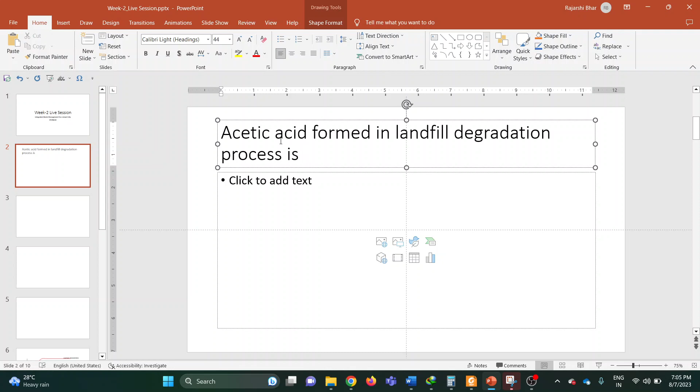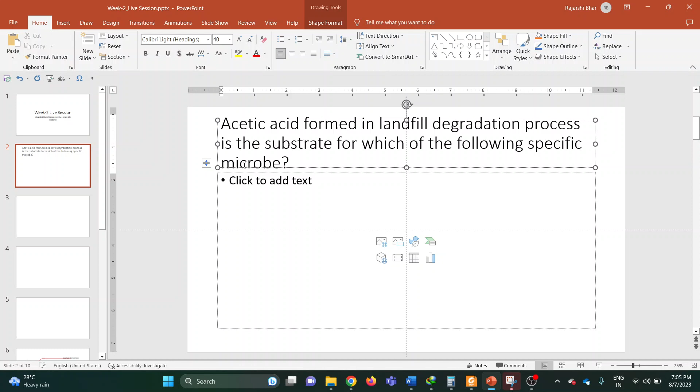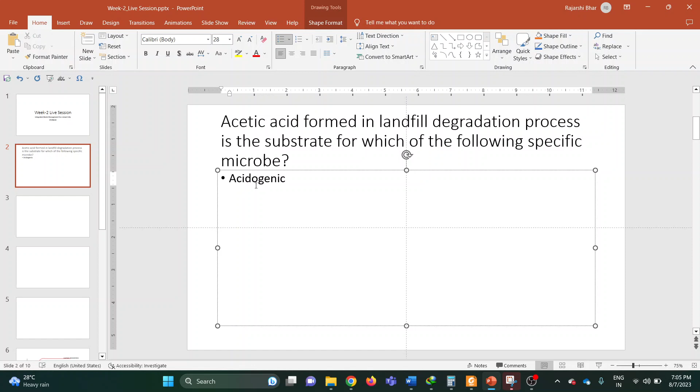so the question is that in landfill degradation process, acetic acid is formed, and which of the following microbes is responsible for the production of acetic acid? So your options are acidogenic bacteria, aerobic bacteria, methanogenic bacteria, or anaerobic bacteria. So again, I will repeat the question that acetic acid is formed during landfill degradation processes.

When the microbes present there, they act on a substrate. So which microbe is responsible for the production of acetic acid? One of the options that I can see, option D, Mohammed Hashim has chosen option D. Okay. I will wait for a couple of more minutes for others.

So I will be basically asking two types of questions based on this particular statement. One is what is already written here, and another one I will also ask. So in here it is written that acetic acid formed in landfill degradation process is the substrate for which of the following specific microbes. So that means which of the following microbes eat acetic acid as their food. This is one question. And another question that I would like to ask is which of the microbes are responsible for the formation of acetic acid? And for that question, it can be one of the options and it can also be something else.

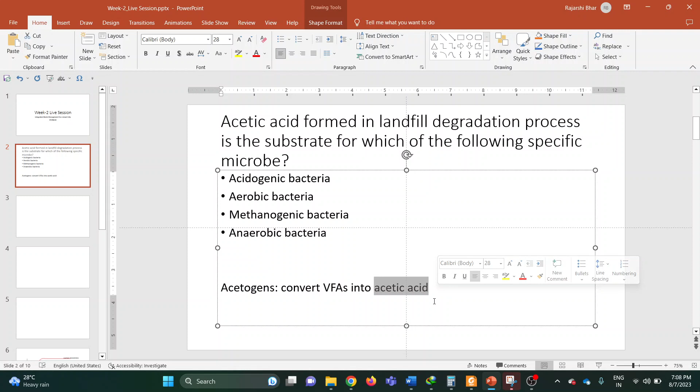Okay, so I can see some of the options. Yes, methanogenic is one of the correct answers. Reason being, when acetic acid is formed in landfill, that formation of acetic acid is basically due to a certain group of bacteria which are called acetogens. These are the group of bacteria which convert VFAs, volatile fatty acids, into acetic acid. And the acetic acid that was formed is then further taken as a substrate for methanogenic bacteria. These methanogenic bacteria eat acetic acid and go forward to produce methane.

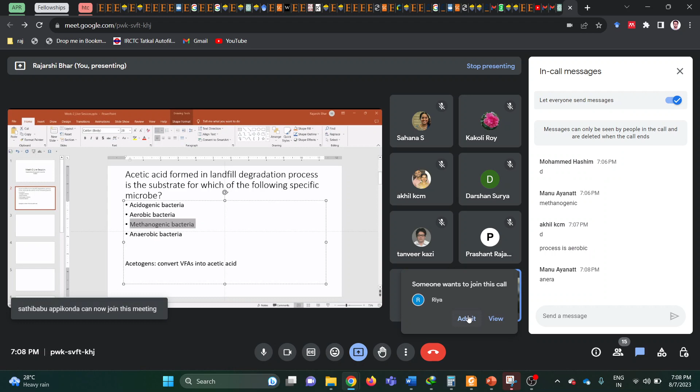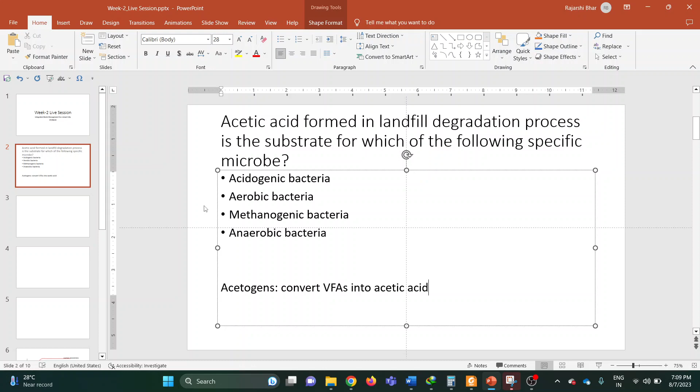I hope this question is clear. Now moving on to the next question. If you have any doubt, please feel free to interrupt me. In the upcoming questions, I will also be explaining in detail about these degradation processes that are taking place in the landfill, and discuss some of its phases. So our next question is

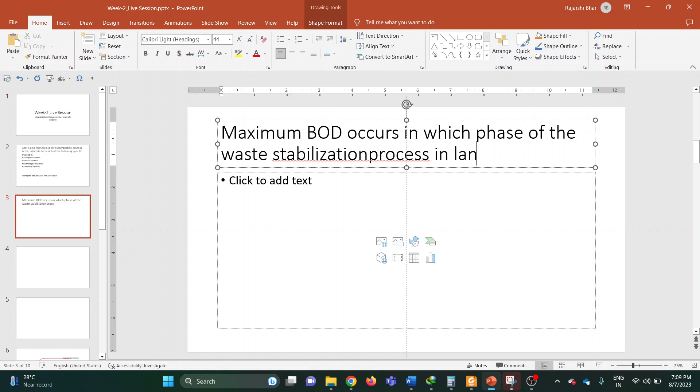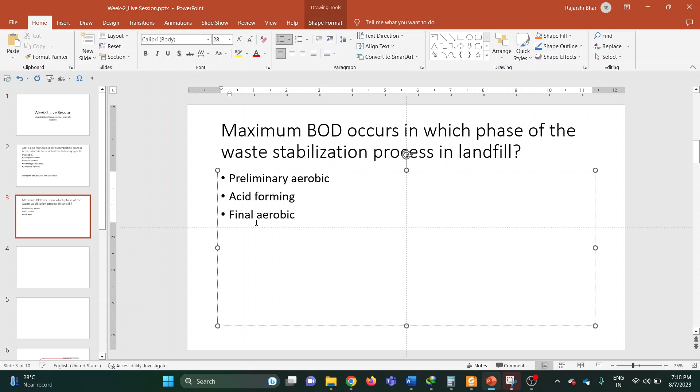maximum BOD occurs in which phase of the waste stabilization process in landfill? So during which phase of waste stabilization in landfill is the BOD maximum? Your options are preliminary aerobic phase, acid forming phase, final aerobic, or methane forming phase. Along with this, I would like to post another question: what is the full form of BOD, and what does it signify and what is the meaning of it?

I will repeat the question again. During the degradation of waste that is dumped in landfill, it goes through various stages. The four primary stages are preliminary aerobic, acid forming, methane forming, followed by final aerobic. Among these four stages, during which stage is the BOD maximum?

First question is that. Second question is what is the full form of BOD? And third question is, why do we use BOD? What is its significance? And if anyone is comfortable, they can also unmute themselves and share their opinion on this.

Yeah, I can see some of the answers. Option B, most of them are saying acid forming phase. Okay, yeah. And biochemical oxygen demand is the full form of BOD. Yes, it is absolutely correct.

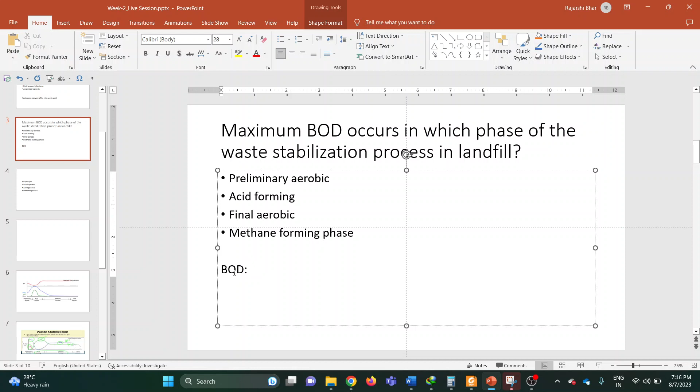Okay, so Manu Ayanatt, I can see that the answer provided is that biochemical oxygen demand is the amount of oxygen required to decompose organic matter by microorganisms. Okay, yeah, this is basically what we are trying to determine. Anything else that you might want to share? You're always free to unmute yourselves and discuss any points that you might want to add on to this or anything else.

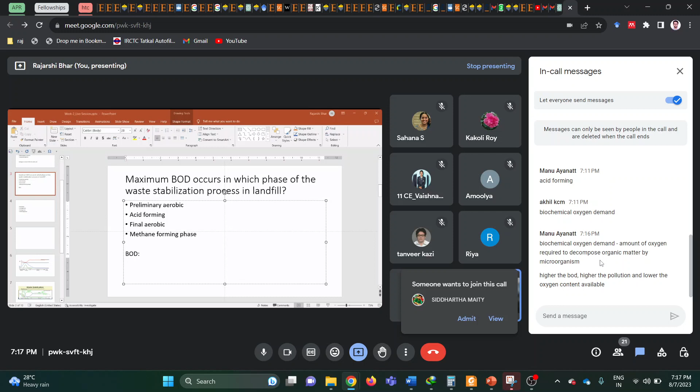Higher BOD means higher the pollution and lower the oxygen content available. Okay, yeah. Okay, fine. So I will share my opinion on this. So as correctly said, biochemical oxygen demand is the amount of oxygen required to decompose organic matter by microbes. And since wastewater or any other water stream may have a huge mix of different kinds of compounds, particularly organic compounds,

it is very difficult to get the concentration of those organic materials present in our water body or anywhere else. So what we do is, we know that one characteristic property these organic materials exhibit is that when I throw them into the environmental matrix, the microbes act on them in an aerobic condition. The microbes consume oxygen and degrade them mostly to CO2, and carbon monoxide when this conversion is not complete. So mostly it is CO2.

So I will take the analogy of dumping sewage into wastewater. If I am dumping my sewage into wastewater, first things first, our sewage has a huge organic loading. The COD of the sewage is easily more than 300 milligrams per liter, and it can often go as high as 800 milligrams per liter. BOD is a bit less than COD; for readily biodegradable material, the BOD is equal to 0.67 times the COD.

So when I dump such waste into the water body, it starts consuming oxygen. That is how we correlate the amount of organic material present in that water body, because there is no way to directly estimate their amount. So we correlate it: the higher the oxygen being consumed, the more organic material must be present. That was the motivation when people started estimating biochemical oxygen demand.

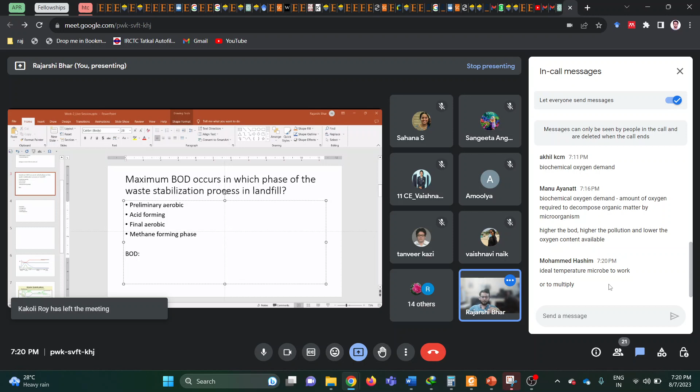What you have said is correct, but by that example I can increase the temperature to 27, the microbes will eat the food faster, and we can get 80% removal of organic matter in, let's say, 3 days. The reason it is 5 days and 20 degrees centigrade is that, if you want to put any logic behind it, there is none except one: biochemical oxygen demand was standardized in England.

The place where they were determining biochemical oxygen demand was somewhere on the river Thames, and when sewage was dumped into the Thames at that particular point, it took about 5 days for that sample of water to reach the ocean. So the researchers decided that within 5 days, before it reaches the ocean, the organic material should get degraded. That is why they took the 5 day time period.

And the reason behind 20 degrees centigrade is also geographical, because in England the temperature at that time was somewhere around 20. So these two were the main reasons. So if you go on a field visit or to some other place and want to determine the standard biochemical oxygen demand, practically speaking, you won't have the time.

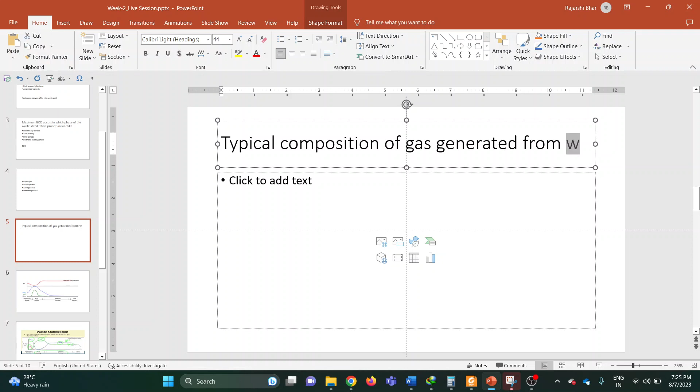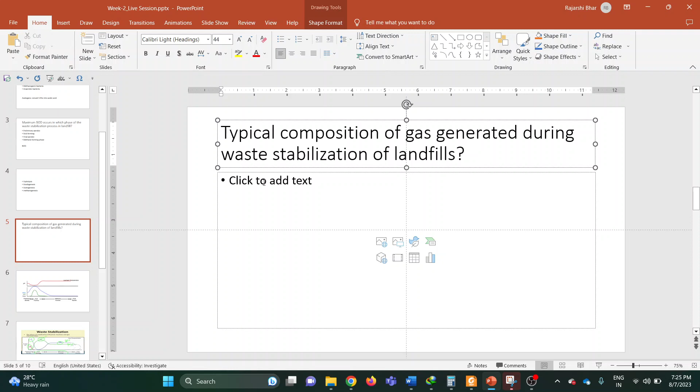It is very easy. What is the typical composition of gas generated during waste stabilization of landfills? Your options are 60% methane, 40% CO2; 50% methane, 50% CO2; 40% methane, 60% CO2; and finally 90% methane and 10% CO2. So which one do you think is correct?

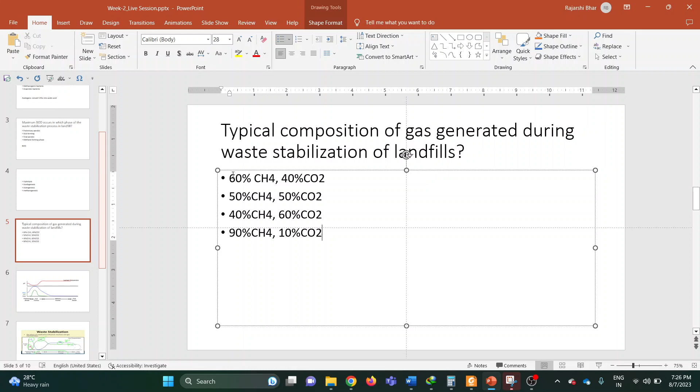Option 1, sir. Yes, absolutely correct. Option 1 is the right answer. Obviously, we know that waste stabilization in landfills is an anaerobic process, so we can already guess that methane will be formed. And I will show you one graph where you will understand why methane is more than CO2. You can see in the screen, I will zoom this a bit.

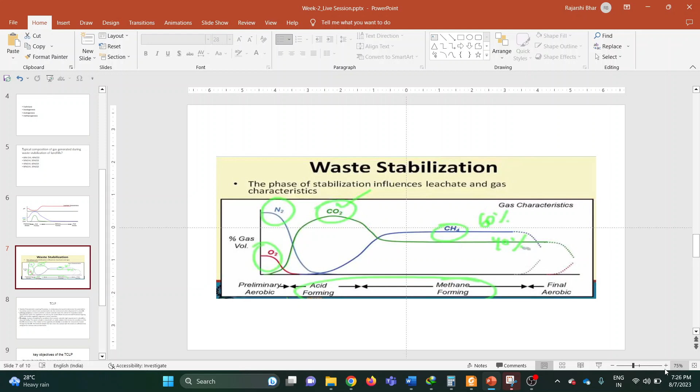When the landfill has stabilized, you can see that the CO2 initially is higher. It is in the acid forming stage where the CO2 is more. But once methane forming starts, the methane production will increase drastically. And during this stabilized stage, you can see that methane is more than carbon dioxide, this green line.

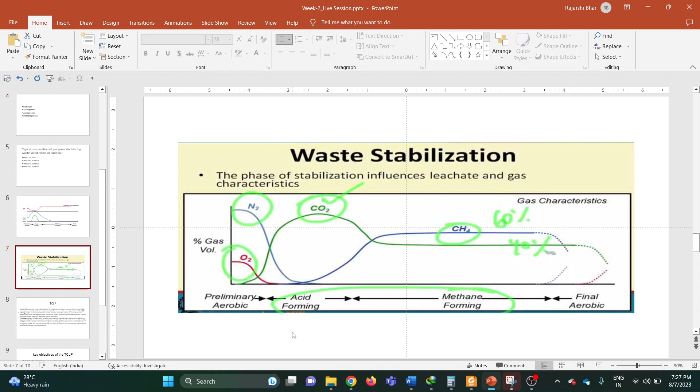Typically, about 60% is methane and 40% is carbon dioxide. But if you really dig deep into it, you might also see trace amounts of hydrogen sulfide. So that was the correct answer. Moving on to our next question, this is an assertion and reason based question. I will give you two statements and based on those two statements, you have to choose a correct answer.

So statement A is: in TCLP test, the solid waste particle size is reduced to less than 1 centimeter. This is the first statement. And then the reason behind this is the finer particles have more surface area, and that helps in... yes. So the first statement is that in TCLP the solid waste particle size would be less than 1 centimeter, and the reason that this option states is that the finer the particles, more is the surface area, and that helps in improving the reaction rate significantly.

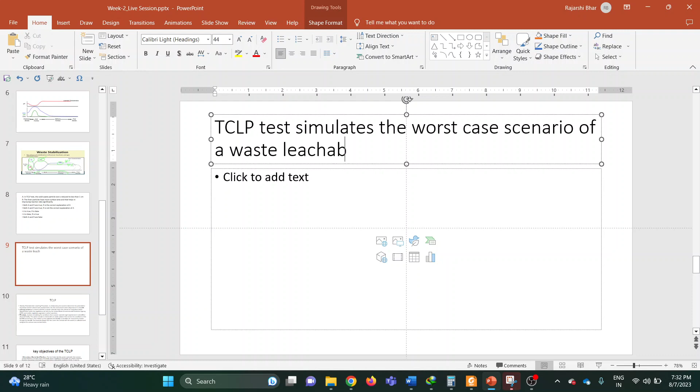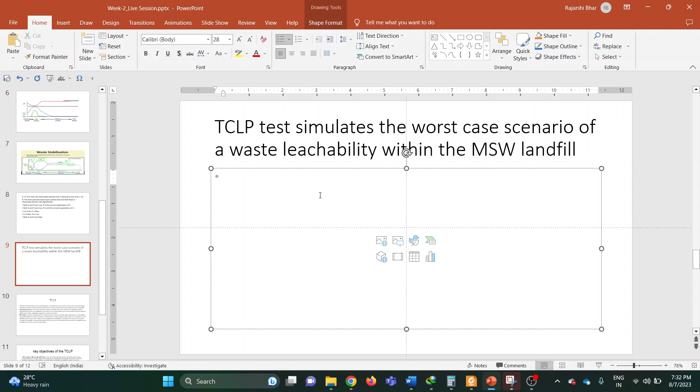So next question is related to a true and false. It is that TCLP test simulates the worst case scenario of a waste. So this is a true and false question. The statement is TCLP test simulates the worst case scenario of a waste leachability within the municipal solid waste landfill. So if your answer is true, please share with us why you think it is true, and if it is false, then why so. It's true because the intent of this test is to understand if the waste can go into an MSW or is it a hazardous waste. Yeah, correct. That is the basic intent behind it.

So have you already been taught how TCLP is being done in labs and in the classes that have been going on? Was it taught there already, or is it about to be taught? Whatever the reason, I will just explain briefly what basically TCLP is. So as you correctly stated, the intent is to determine whether a certain waste exceeds a toxic limit and is hazardous or not, so that it is not disposed in a landfill. So before I dispose any kind of waste into the landfill, I have to pass it through TCLP test. If the leaching is below the standard limits, then it is fine, we can dispose it there. Otherwise, that material will be within the hazardous waste category.

And as per the US EPA, the United States Environmental Protection Agency, it is not recommended that such waste should be dumped into the landfill. Now what happens is that we first reduce the size to less than 1 centimeter. Then in landfill, as I have already shown you, in the acid forming stage, acetic acid, volatile acids, fatty acids are formed. So then the waste material of less than 1 centimeter size is mixed rapidly in an acidic medium to simulate the conditions in a landfill. And if after all that mixing and agitation I find that the contaminant level in the aqueous phase has exceeded a certain permissible limit, then it is not recommended that the waste should be thrown into a landfill.

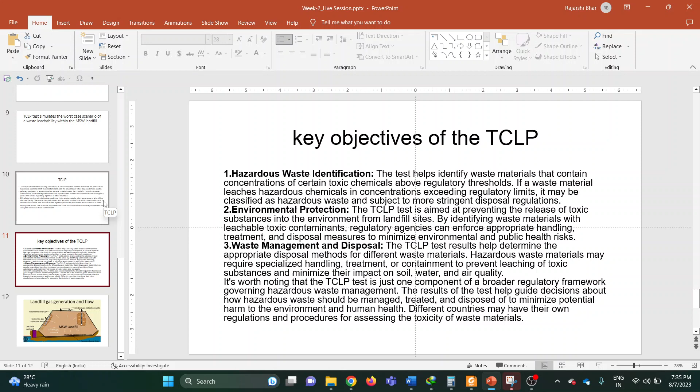So obviously some of its basic objectives are, it can help us identify which kind of waste is hazardous. Based on that, various environmental protection steps can be taken, and the management and disposal of those particular wastes should be done separately, and that will also help us in building a different management plan as well. So these are some of the objectives or goals of TCLP. Then moving on to the next question.

So there is a waste to energy concept. You already know that. The question is why is waste to energy conversion unsuitable for waste which has very high moisture content? I will also write it here. Waste to energy not suitable for high moisture content wastes. So you have to guess why it is not suitable. Okay. So which one do you think out of these four options is correct? Waste which has very high moisture content is not suitable for the waste to energy concept or that kind of disposal method.

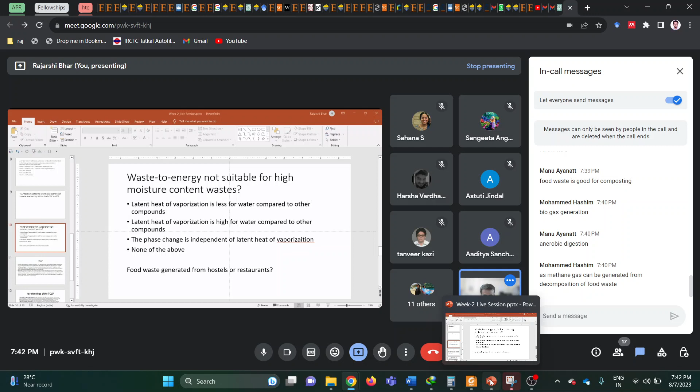So what happens is that in those cases, we often first pretreat our raw material, that is the food waste, through some techniques, and then we can feed it to the microbes. Or another way can be, you add food waste to an anaerobic digester, let it stay there for a suitable amount of time so that the microbes get acclimatized to that kind of feedstock, and then the methane generation will run nicely. So that was it. So moving on to the next question.

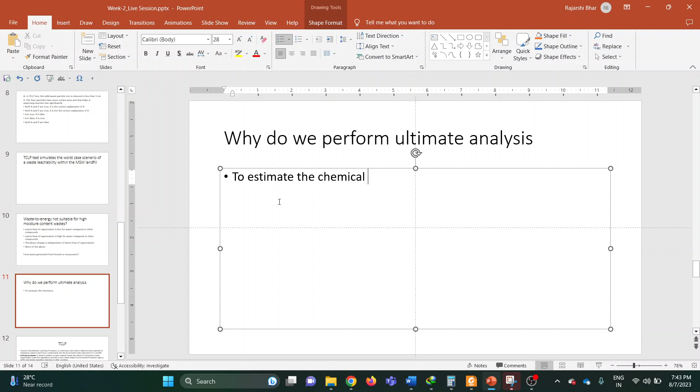Next question is, why do we perform ultimate analysis? And your options are... Okay, so these are our options. Why do we perform ultimate analysis? This is quantification. Yeah. So you can guess or think about the answer and share it in the chat box.

And you can also share a few points like what is ultimate analysis. Ultimate and proximate analysis are two of the most frequently used characterization methods that give us information about the nature of the waste.

So can you think of which of these is the correct answer? And what is ultimate analysis? What is proximate analysis? Would anyone like to share their thoughts on them?

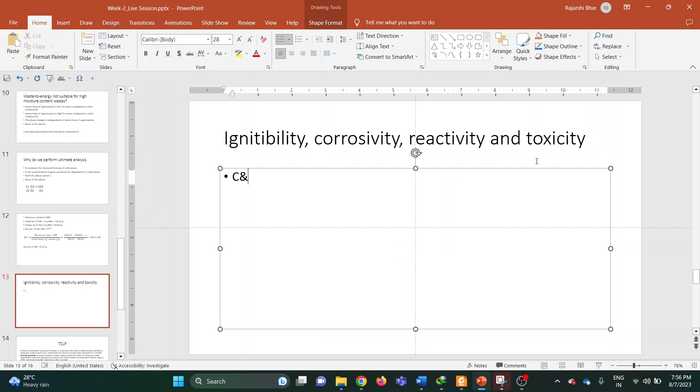So a waste which is exhibiting all these four characteristics: ignitability, corrosivity, reactivity and toxicity. What kind of waste is it? Is it a C and D waste? C and D waste means construction and demolition waste. Is it a hazardous waste, an agricultural waste, or a household waste? Which kind of waste exhibits these properties?

Yes, I can see most of you have chosen the correct answer. That is option 2. A hazardous waste is one which shows such characteristics. Fine. So quickly moving on to the next question. This is again a numerical type of question where the energy content of solid waste is 210 kilojoule per kg. This is the energy content.

After that, you have got moisture content of the waste is 9% and ash content is 6%. So you have to determine what is the energy content of the solid waste in moisture free basis. This is one part. What is the energy content of the solid waste on moisture free basis, and then another one is on ash free and dry basis, both.

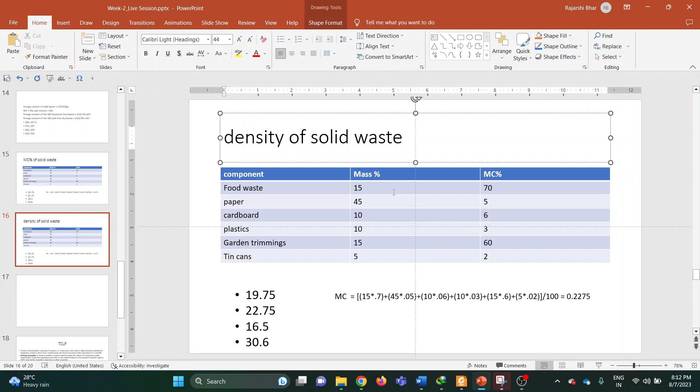So now moving on to the next question. It will be again a numerical type of question following similar pattern, but instead of moisture content, you have to determine the density. Fine. So instead of moisture content, you have to find the density of the overall solid waste, where food waste will be 15 and its density is in kg per cubic meter.

So these are the densities and these are the mass percentages. So you have to determine what is the overall density of the solid waste. In the meanwhile, I will put some options here, and all the options are in kg per meter cube. So these are the options. You can take some time to calculate it.

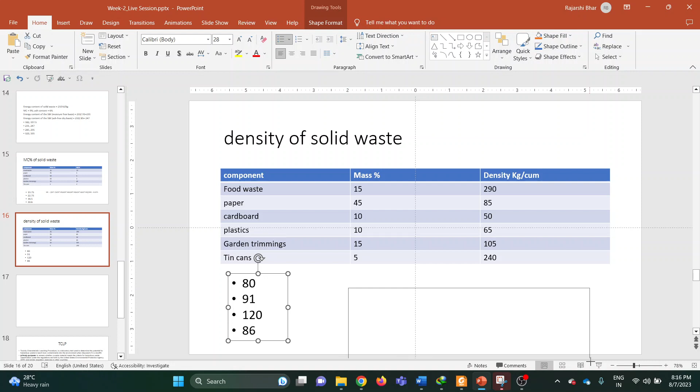So you have to determine the density, and density means mass divided by the volume. So total mass, I am assuming that this entire column, everything is in grams. So the total mass is 100. That thing is sorted. The individual ones you need to find out. So that will be divided by the total volume. So if you have got 15 grams of food waste, what will be the volume that it occupies? It will be 15 divided by 290. That is one component's volume.

Now you have got 45 grams of paper. Its density is 85, 45 grams or kg, whatever that can be. So for example, we have got 45 kg of paper. Its density is 85 kg per meter cube. So what will be the volume? The volume will be 45 divided by 85. So like that we will do for all the components. Finally, for tin cans we will be doing 5 divided by 240. In this way we will have the total volume. So total mass divided by total volume, you will get a value close to 91 kg per meter cube. If you have any doubt, you can please unmute yourselves and clarify them.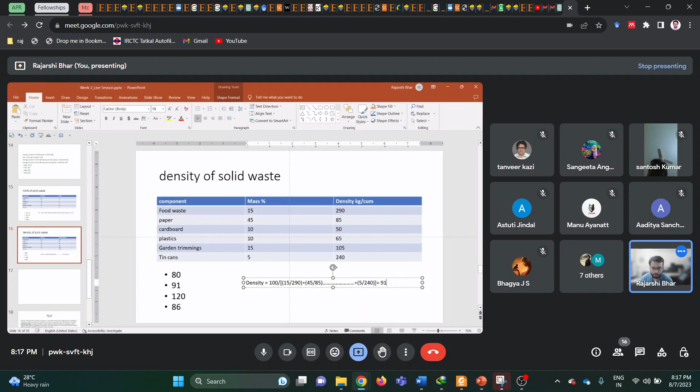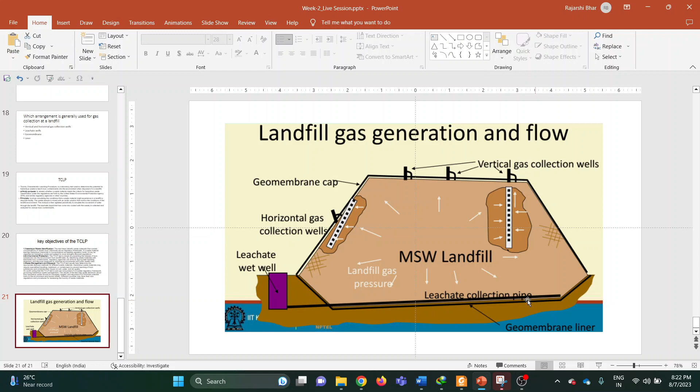And now the other components given in the question were leachate wells, geomembrane and liner. As you must already know, a leachate well is a well which collects the leachate. So when we construct a landfill in a proper way, the base of the landfill, you can see, is not horizontal, it is inclined. So it can be like this, or the base can also be made like this. I will just draw it here. So you can see the pipe which is present, the cross section I will show you, and this is the leachate collection pipe.

You can see that this pipe passes through the lowest point in the landfill because whenever the leachate is formed, it will seep through the entire waste mass, then slide down to this lowest point and collect here. So if I put this leachate collection pipe here, it will pass through it and then move to a leachate wet well or leachate collection well, from where it is further sent for different treatment techniques to reduce its organic load and pollutant or contaminant levels.

The other part was the geomembrane cap. You can see that it is applied throughout the entire outer surface of the landfill and below it as well. So we have a geomembrane liner below and a geomembrane cap above. The cap is used to prevent the leakage of gas, and the liner below is to prevent the seepage of this leachate into the ground, which if it occurs can be a huge risk of groundwater contamination.

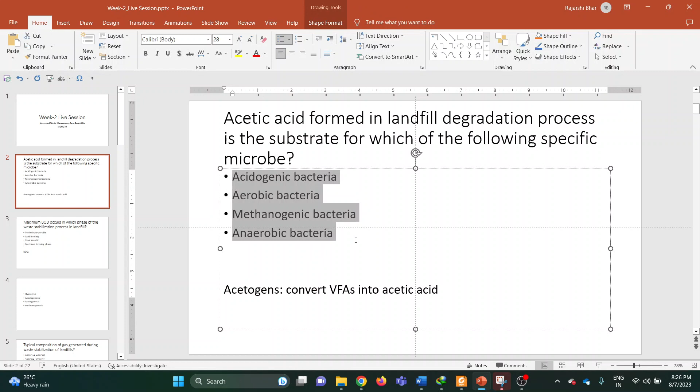So these were the questions that we had in store today. I will quickly go through them again for those who joined a bit late in today's live session. So the first question was: acetic acid is formed in the landfill degradation process, which serves as a substrate for a particular kind of microbe. So which of these four types of microbe uses acetic acid as a substrate? This was one part of the question. Another part, which is not written here, was what are the phases of degradation in a landfill or any other anaerobic process, like how acetic acid is formed.

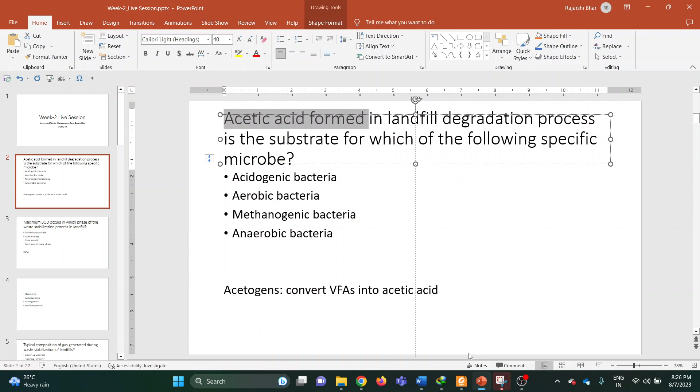So for the first part, which kind of microbe consumes acetic acid or uses it as its substrate, the answer is methanogenic bacteria. I will quickly show everyone one PDF here. Okay, so it might not be visible to you. Fine, so I guess my screen is visible.

So anaerobic digestion occurs in landfills or any other anaerobic treatment. In the processes involved, first the waste or any other feedstock consists of carbohydrates, fats, and proteins. So the degradation begins with hydrolysis. Water starts breaking the bonds of these macromolecules to form smaller molecules: carbohydrates break down to form sugars, fats break down to form fatty acids, and proteins break down through hydrolysis to form amino acids. Once these are formed, the step which occurs next is acidogenesis.

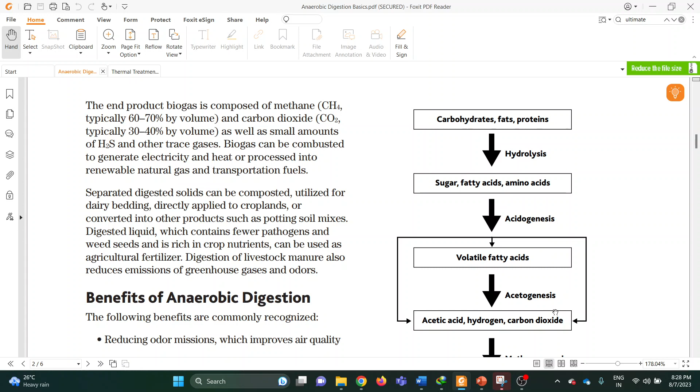In acidogenesis, you can see that volatile fatty acids are formed. Some amount of acetic acid, hydrogen, and carbon dioxide can also be formed, but mostly it is VFAs. And in the next step, the VFAs are consumed as substrate by the acetogenic bacteria, which finally form mostly acetic acid, along with hydrogen and carbon dioxide, based on the kind of microbe present.

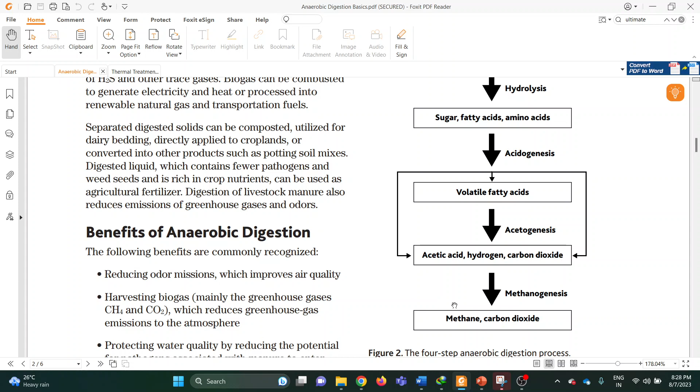Finally, in methanogenesis, as the name itself suggests, it is the stage where the methanogens, the microbes active in this phase, consume acetic acid, use it as their substrate, and produce methane and carbon dioxide. So this is the basic flow diagram for any anaerobic digestion process.

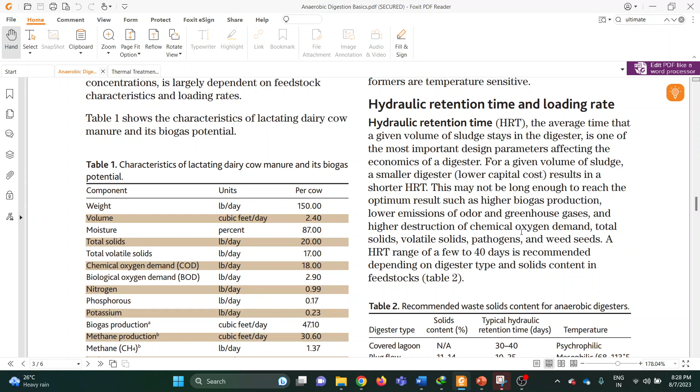This is one point that I would like to share with you, and I will just quickly see if there is anything else interesting in here. Nope, that was it. Okay, so this was the first question.

At the same time, whenever the VFA, that is volatile fatty acid concentration, is high, more acids means lower pH. That is why the leachate formed in those phases often has very low pH as compared to the methane forming phases.

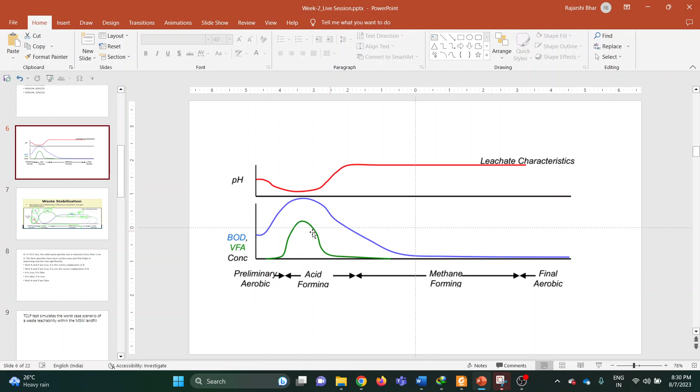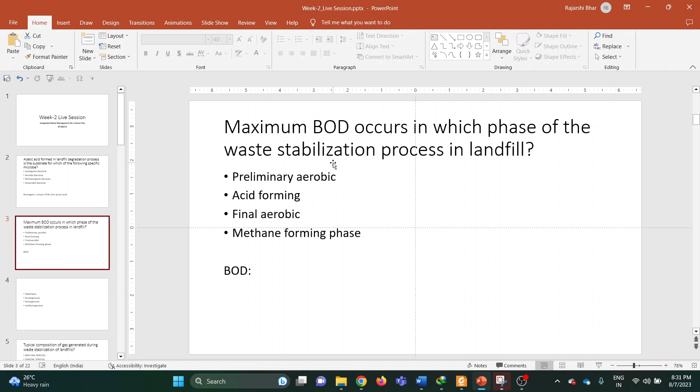Now, a few other points that were discussed in here was that whenever we are talking about BOD, which is the biochemical oxygen demand, the usual standard is we measure BOD for an incubation period of 5 days and an incubation temperature of 20 degrees centigrade. So we discussed the reason why we have got that 20 degrees centigrade incubation temperature and that 5-day incubation period.

So the main reason behind this was not due to any logic that, let's say, 60% of the waste is getting degraded. Practically, it is not there. The reason was that this BOD5 at 20 degrees centigrade was formed in England, with the basic idea being that the point where the BOD was being calculated was on the bank of the River Thames.

So the people there thought that, okay, I am dumping my waste here, and approximately they knew that within 5 days the waste which has been dumped into the river, based on its flow velocity, would reach the ocean or sea. So the target was that before it reaches there in 5 days, the waste material should be degraded. So that was what motivated them to choose that 5-day period.

And why the 20 degrees centigrade temperature? It is also based on the geographic significance. England is not a place where we see very high temperatures; these days it has risen quite significantly. But at the time when the BOD5 at 20 degrees centigrade was formulated, it was more or less around 20 degrees centigrade. So that is why this became a standard 5-day incubation period and 20 degrees centigrade incubation temperature.

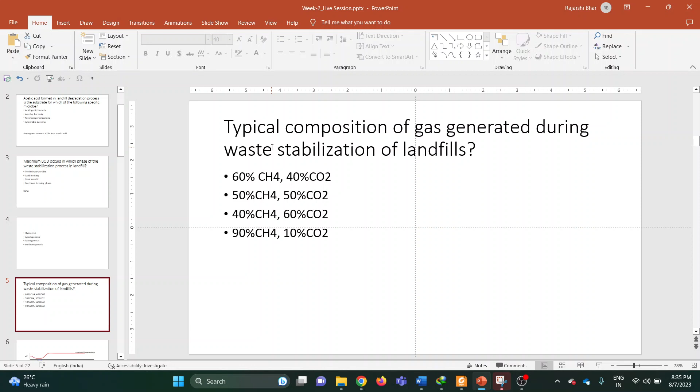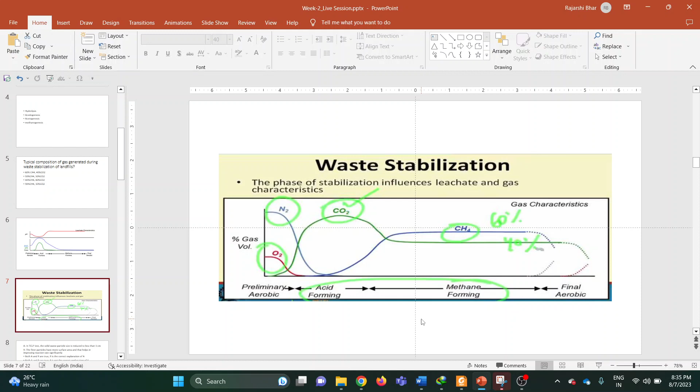So with the help of a certain figure, I can show you that in the methane forming phase, methane formation is around 60%, while the CO2 is lower than that, around 40%. So that is why a typical thumb rule that we see in a stabilized landfill is that methane formation is 60% and carbon dioxide formation is 40%.

So that was it. Then next question was about TCLP test, which is the toxicity characteristic leaching procedure. So two statements were given. Statement A, an assertion, stated that in TCLP, the size of the solid waste particles is reduced to less than 1 centimeter. And the reason stated was that the finer the particles, the more is the surface area, and thus it improves the reaction rate significantly.

So these were your options, whether one of them is true, which is the reason, and so on. So with that respect, you can very easily understand that in a TCLP, the first statement is correct, that initially the particle size is brought down to less than 1 centimeter. And the reason behind this is that when you reduce the particle size, the total surface area of that solid waste increases.

Resultingly, when you disperse it in an acidic solvent system, there is much more surface area of the waste material to interact with the aqueous phase. More surface area taking part in a reaction increases the reaction rate significantly. So that was the reason.

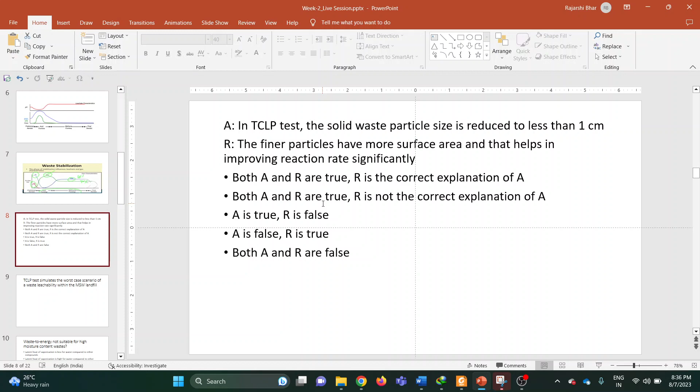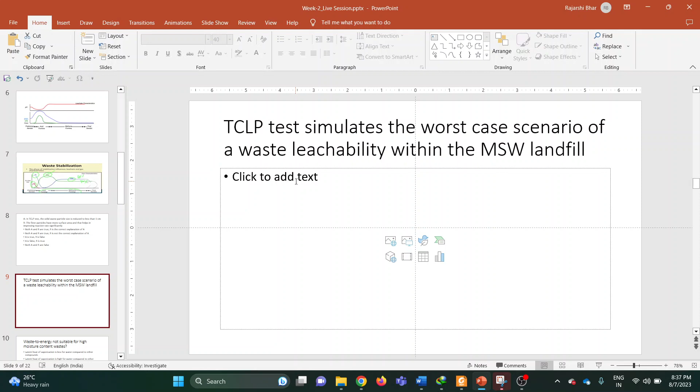Okay, so next question was: TCLP test simulates the worst case scenario of a waste's leaching ability within the MSW landfill, municipal solid waste landfill. So this was a true and false kind of question, and you can clearly understand that the answer is true because that is what basically TCLP does.

Then the other question was, if you have a waste to energy kind of facility where you put in your solid waste, you burn it, combust it, and then generate the energy. So in such a facility, if you are receiving waste having very high moisture content, then what will happen? Among the different options, it is somewhat related to latent heat of vaporization of water.

So when I am receiving a waste which is dry, mostly containing paper, plastic, things like that, the calorific value is shooting up. So when you burn that waste, you get much more energy because the combustion process is basically an exothermic process. Heat or energy is generated. Later on, you can use that heat to produce electricity or use it as heat itself for various other industrial activities.

Now, if you are getting a waste having very high moisture content, what happens when you burn it? A significant fraction of the generated energy goes out to convert that moisture from the liquid aqueous phase to gaseous phase, to vaporize it. So the latent heat of vaporization is an energy consuming step and it reduces the overall energy generation from the process. That is why high moisture containing waste should not be treated as a feedstock for waste to energy plants.

If you have any high moisture content waste, which can be your sewage sludge, or your food waste from hostels and restaurants, one way you can treat them is anaerobically if it is a solid waste. And if that waste is having not as high moisture content as sewage sludge, but somewhat less, around 30%, then you can also use it for composting after segregating it at some level.

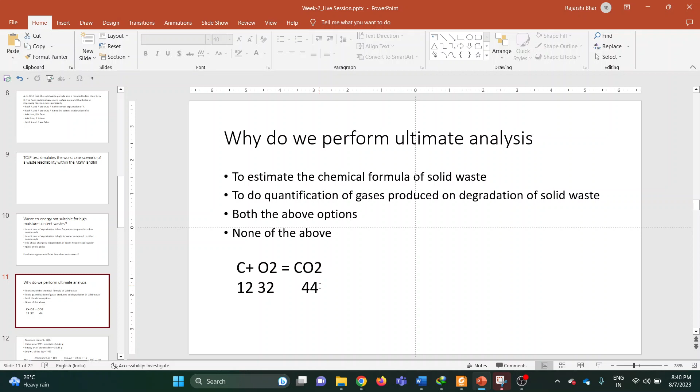So all of those things keep on occurring. The entire reaction is not always as perfect as we expect it to be. So that is why we can use it to quantify with a certain confidence, but not exact.

Then the next few questions were numerical based questions, wherein we have got a solid waste whose overall moisture content is 68%. The solid waste is put into a crucible, and the initial weight of that solid waste along with the crucible is 50.23 grams. Then you have been provided the empty weight of the dry crucible, 30.63 grams. And finally you were asked to determine the dry weight of the solid waste.

So it was very simple. You can see that we know that

someone is trying to join the meeting.

Okay. So you can see that the moisture content formula, we all know, is the mass of moisture divided by the total mass of waste. Very simple. So what will the mass of moisture be? We have got the initial wet waste plus crucible as 50.23; subtract the dry weight of the crucible, and you will get the initial weight of the wet waste, that is 50.23 minus 30.63. This 30.63 is the mass of the crucible. So when you subtract it, you are left with the initial weight of the solid waste.

Let's say X is the final weight or dry weight of the solid waste. So when you subtract the dry weight from the initial weight of the solid waste, you are getting the mass of moisture. So in the numerator you have got the mass of moisture, in the denominator you have got the total mass of waste. Multiply it by 100 and put it into the equation, you will get the value of X as 6.27 grams. So that was a very simple question that we solved today.

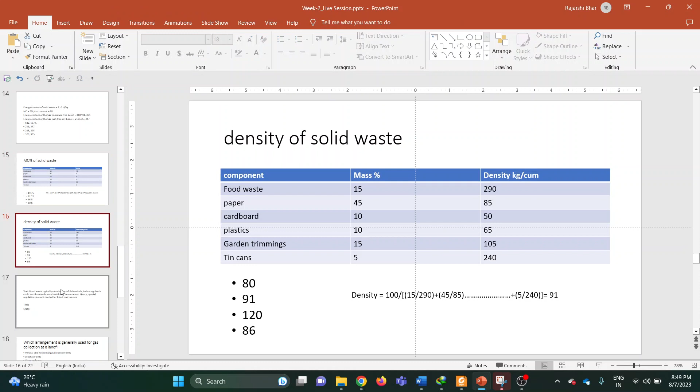Then finally, we had the next question wherein it was a very simple statement. It was given that a toxic listed waste typically contains harmful chemicals, indicating that it could not threaten the human health and environment. So it was a true and false one, and anyone can clearly say that it is absolutely false.

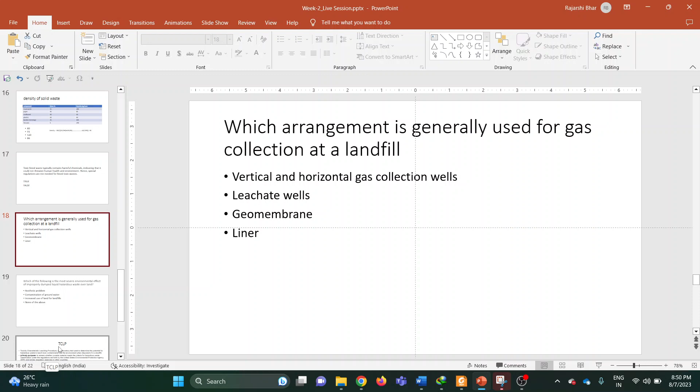Then finally we had the question wherein it was asked that for collecting the gas generated in landfills, what do we use? In here you had got several options starting from gas collection wells to leachate wells, geomembrane and liners, wherein the correct answer was vertical and horizontal gas collection wells. They are being used to collect the gas generated in a landfill.

So this is one diagram where you can see that these are the vertical and these are the horizontal gas collection wells. The landfill gas that is generated inside the landfill is under pressure, and since these gases are open to low pressure points, due to the pressure gradient, it moves from inside the landfill, passes through these wells and goes out from where it is collected.

Now geomembrane is used as a cap over the landfill to prevent the entry of water and air or leakage of the same. Then I have got the geomembrane liner, whose job is to prevent the leaking of the leachate into the soil and finally reaching the groundwater. It has to prevent it.

And then I have got the leachate wet well, whose name itself suggests it. In the landfill you can see that there is an inclined slope. The leachate that is seeping through here and collected, reaching the bottom, will move through this gradient and get collected at a lower point. So these were the roles of different components of the landfill.

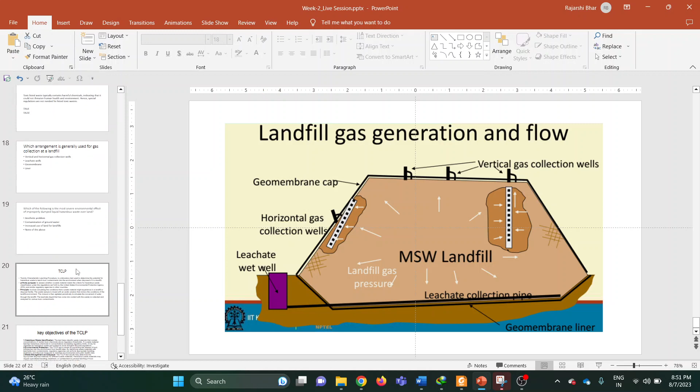Finally, after that, we had this question wherein it was asked which of the following is the most severe environmental effect of improperly dumping a liquid hazardous waste over land. And in here, the correct answer was that the highest risk was posed by groundwater contamination, because that liquid, along with its various dissolved contaminants and pollutants, can seep through the soil, and if it reaches the groundwater level, that can be a very, very threatening situation.

So these were the couple of questions, about 15 questions, that we discussed today. If you have any doubt on it, any points that you would like to share, or add something to these questions, please feel free to unmute yourselves and share that with everyone here.